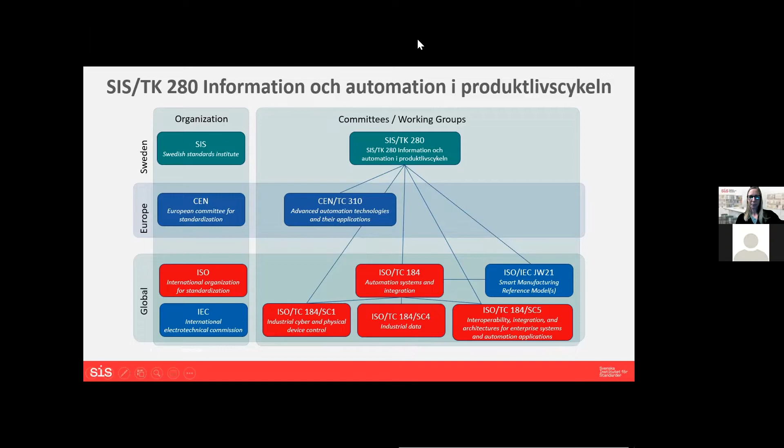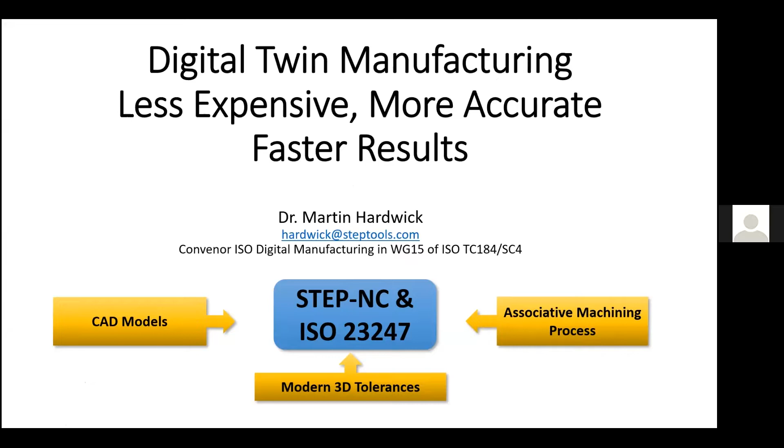I would like to talk about digital twin manufacturing using the new standard that was just mentioned, ISO 23247. This is a framework standard that describes how to fit other standards together in order to make digital twins during manufacturing.

The benefit of doing so is that we have these real-time models of the manufacturing, and those real-time models allow the development of applications which reduce costs, produce more accurate results, and produce them faster.

The ISO 23247 standard is a framework. It can be used with many other data standards, but in what we'll be talking about today, we'll be using it with STEP NC, which is ISO 10303-238, or more concisely known as Application Protocol 238.

The thing about 238, or STEP NC, is it takes the CAD models and associates machining solutions with them so that you can measure how well you're doing based upon the tolerances on those models. So it's all quite exciting stuff, because we have a framework, we have solutions, and we have the ability to measure on the shop floor using those models.

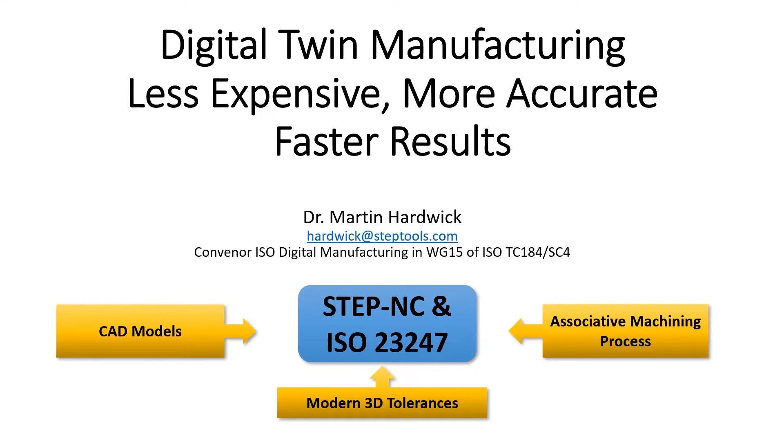So a little bit of background. I don't know how familiar people are with STEP. I imagine most people have got some familiarity with it, and are also probably familiar with the idea that it's been around for quite a long time now.

It started around 1995 with enabling the exchange of solid models. It moved on around 2003 to also reliably exchange assemblies of those solid models. Then with the first edition of AP242 in 2015, we were able to exchange annotations on those models so that you could visually verify what was happening.

And now most recently, in 2020, we released edition 2 of AP242. ISO released it, and that enables the exchange of tolerances. That's all work that took place in SC4, independently of my particular group.

But the key takeaway is that STEP keeps expanding, and when we do these expansions, they tend to be of a pretty substantial nature. When we first in 1995 exchanged solid models, many people were willing to say that you could not do that using a neutral data standard, that you had to do a direct translator. That's important to remember, because it did take 5 or 6 years for the exchange of solid models to become reliable.

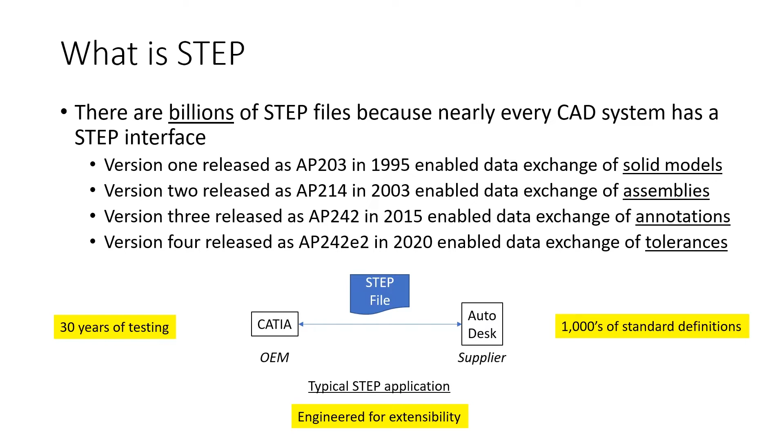So that's what we're trying to do with STEP NC: we think it's more efficient to put the manufacturing process into the same STEP file as the manufacturing workpiece, so that the results of each working step can be compared to the requirements for that stage of the manufacturing.

So we have had 2 editions of 238. The first edition was enabling precision machining, and there are now large numbers of shims being produced using AP238 for commercial airplanes. We predict that version 2 of 238, which was released about this time last year, is going to become very important for the precision assembly of aircraft components.

The way it's being done, largely speaking, is by combining your STEP file that comes out of your CAD system with an APT CL file that comes out of the CAM system, that then can go into a digital twin application that the intelligent CNC can process and send back results using QIF, MT-Connect, and other standards. And I'll talk a little bit more about this in a moment.

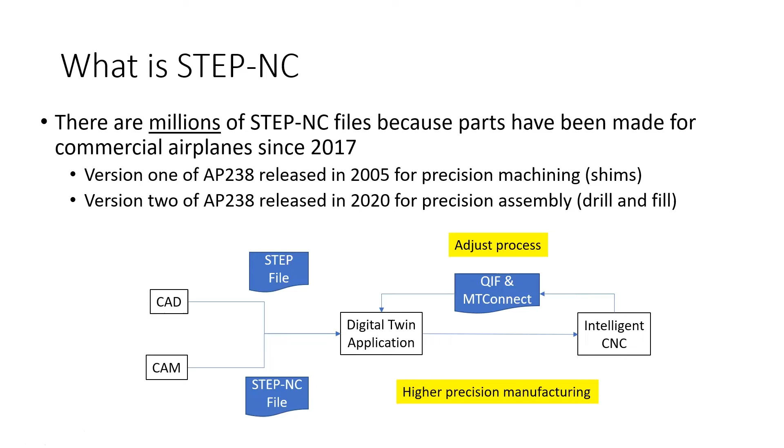So what we've done most recently is release the 23247 digital twin framework for manufacturing. So what we're looking to do is have lots of devices on the manufacturing shop floor, physical things, but also virtual things such as processes that are to be executed. There will be data collection going on with those processes, as well as dynamic control.

Using these digital twins, which are the digitized version of the physical or virtual things on the floor, we can then enable a range of new applications like real-time control, offline analytics, health checks, predictive maintenance, and so forth, with the new benefits of in-loop planning and validation, better production scheduling, enhanced understanding, dynamic risk management, and so on.

So within this framework, we see STEP and STEP-NC being used to model these digital twins, and we see MT-Connect and QIF being used to send information from the shop floor equipment to those digital twins so that they can be updated in real time. So the key thing about the framework is it's all about making twins. It is only a framework, although I'm very much committed to using STEP and STEP-NC with it. Other standards could also be used. But it is focused on manufacturing, with the communication protocols having been developed to be suitable for the manufacturing shop floor.

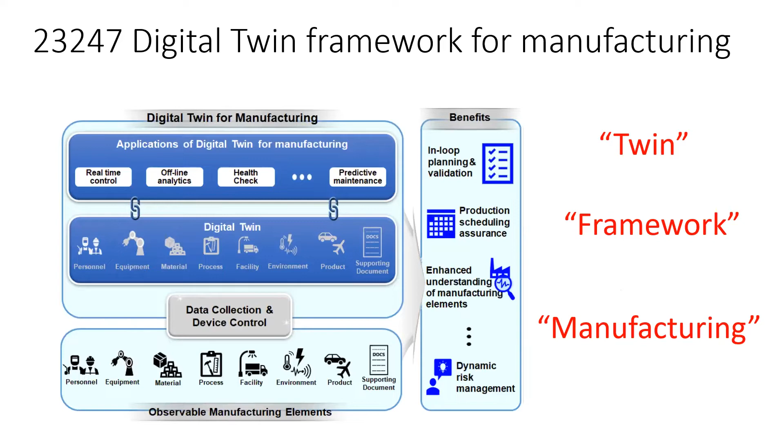Here's a more detailed version of the architecture. It is layered on the IoT architecture, which is 30141. There are various functional elements suggested for helping the implementation. The digital twin entity, as I said before, is going to be a data model, a product and process model of what's going on the shop floor. Then we have the collection and control entities, which will be collecting that MT-Connect, QIF, or other kinds of data, which will be emitted from the observable manufacturing elements as they execute. So we observe at the lowest level, we collect at the next level, we model at the third level, and then we learn and act on those models at the fourth level.

And this, as I said, is the ISO 23247 standard, and it was just published this month. So you can go to the ISO website today and purchase the standard. And we are now in the process of creating promotion materials to help people further understand how to use the standard and why they want to use it.

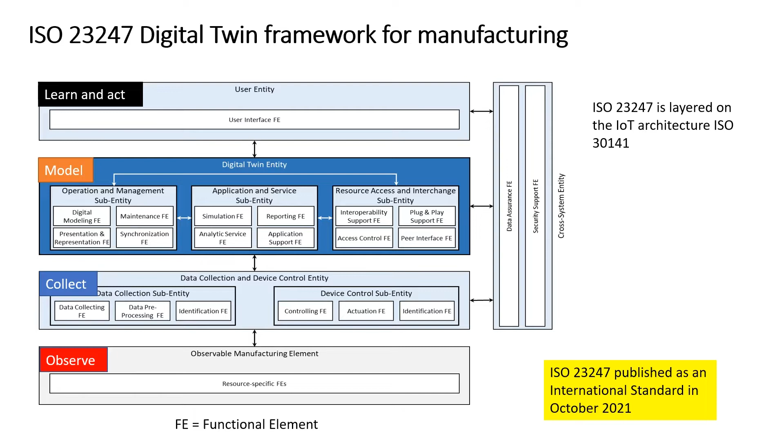In order to be able to use this kind of framework, we have to be able to make digital twins. So one of the first things we need to do is develop a new pipeline that, instead of making G code for machines, makes STEP-NC for machines. That's been our focus for the last year or so, creating the software systems to make this possible.

In the existing process, the CAD operator will make a model. That model will be sent to a CAM operator as an IGES file, or a step file, or some other kind of file. Today's CAM systems are largely set up in the expectation it'll be a collection of surfaces in an IGES file that the CAM operator can then create algorithms that will do the machining of those surfaces from whatever the stock happens to be.

Once the algorithm exists as a process, it then gets posted to G code, and that's actually quite a sophisticated, convoluted process, because every machine tool is different in many small ways. It then goes to the CNC, and now you essentially have a CNC operator who has to do the final stages of the debugging of that machining, and that is actually both tedious and stressful.

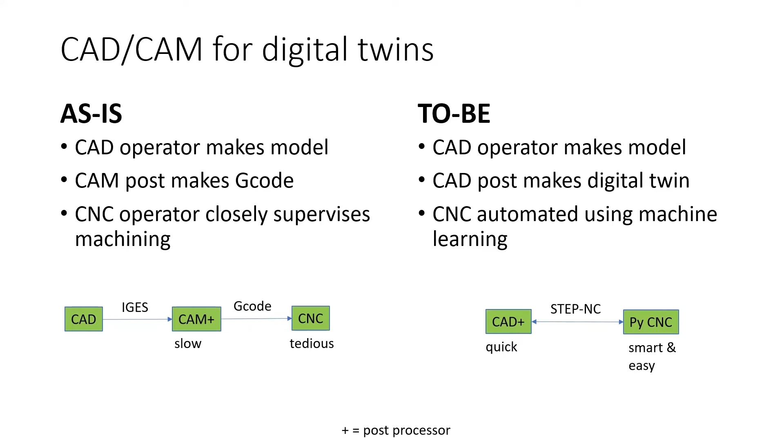Again, it's not going to happen overnight. It's going to happen over the next 5 years, but it is going to happen at this point. And because it's going to happen, we're seeing the leading industry vendors, folks like Lockheed Martin and Boeing, and soon we believe Raytheon and other aircraft manufacturing, shipbuilding, advanced shipbuilding, are beginning to investigate what this new way of manufacturing looks like.

So here is a test part that we've made. For historical reasons, it's made to look like an ashtray, because automated manufacturing started at MIT back in the 1950s, and the first part they made using the APT programming system was this ashtray on the left here.

Being of a historical mindset, remembering the long history of everything, Lockheed Martin is essentially saying: okay, let's show that the new generation of automated manufacturing can do another ashtray to prove it's feasible. And that's what they've gone ahead and done, so that you can very quickly and easily make this ashtray with the minimal number of data entries, so that it should be reasonable for the CAD operator who made the model to quickly add in the basics.

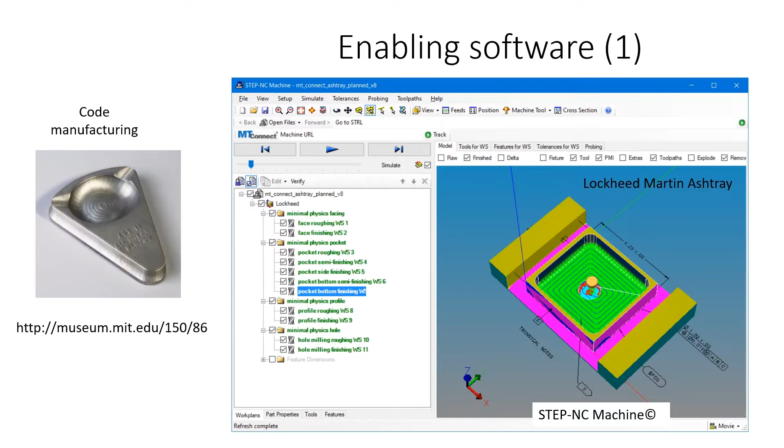So we have our enabling software that we're building for this. We're looking to minimize the time to make the digital twins, and we're looking to maximize the opportunity for optimization and analytics.

So we have the ability with the UI DLL to either make the data, and we're beginning on the ability to intelligently process that data—the beginning of what we might call twin analytics—where there are large databases of previous runs of similar operations on similar models, which are used to advise on the results. So on the shop floor, it becomes quick and easy to do the machining, and quick and easy to get a reasonably efficient machining program.

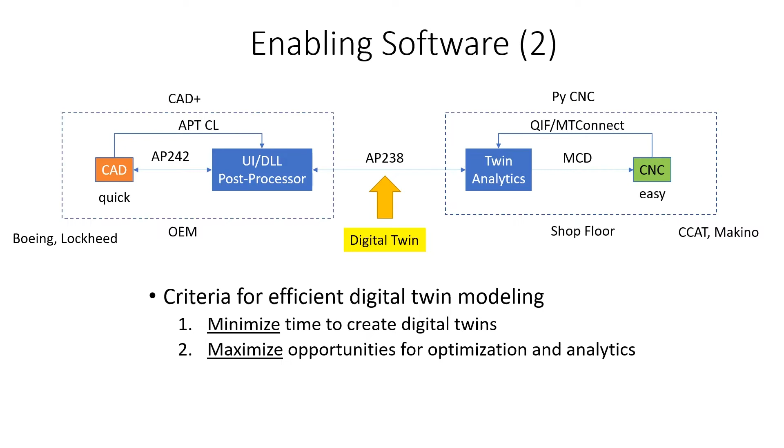Okay, so with these capabilities, how are people going to take advantage of it? That's something we investigated heavily in the summer of 2020. We built some early prototypes that asked: okay, if we have model-based machining available and the right kind of infrastructure, what can we do?

And one thing the guys out of Boeing did was address the need for more flexible manufacturing. They have too often produced very large, very expensive machine tools which will only work for one or a limited configuration of airframe.

More flexible machines are becoming available. Robots are an example of those flexible machines. They are not yet sufficiently strong to be drilling and filling holes, but machine tools that have the flexibility of robots and the strength of a machine tool for that kind of drilling and filling will be available very soon. So rather than have one machine, we'll have, say, 20 or 30 robots on the shop floor. Those robots will most likely be on rails.

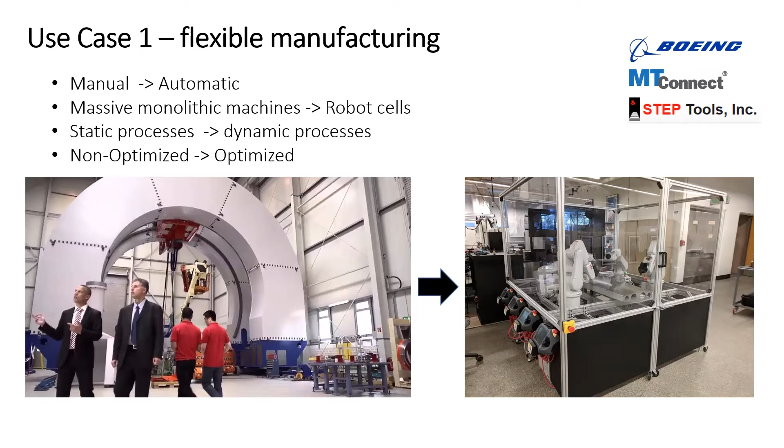Another exciting application we prototyped is based on the notion that although you'd love for manufacturing to be an exact science all the time, it's not. When you're doing composite layout of wings, large dimensional objects with variability in the layout process and curing of parts in the autoclaves, the actual skin you get has different dimensions than the ideal you designed. This is where tolerances come in. As long as the actual skin is within tolerance, everything is considered good. But in order for it to be within tolerance, you need to be quite generous in your tolerance limits, and as a consequence you waste quite a lot of weight.

For advanced aircraft, the cost of that slight additional size is expensive. If we were able to measure every single hole and do the stack-up for every single component dynamically, hundreds of pounds can be saved. We know that's true because for the most advanced aircraft like the F-35, they take the time to measure every single thing. But it's expensive, adds a lot to the cost of the aircraft. It's still too expensive for, say, Boeing to do for their commercial aircraft.

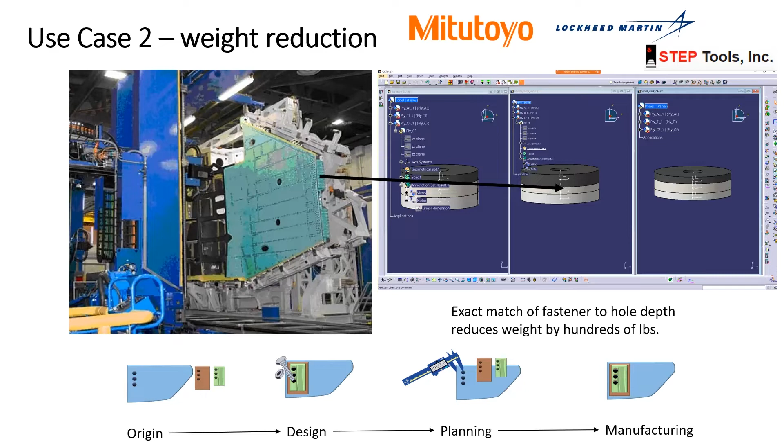The last use case is machining. This use case is based on getting things done more quickly and making more economical use of all available tool wear. Again, when you have models of everything on the shop floor, you can have models of how much material is being removed, and you know what kind of material is being worked. You can build your algorithms to know how much tool wear is being applied at any particular point, and therefore make much better decisions about feed speed trade-offs versus available tool wear trade-offs.

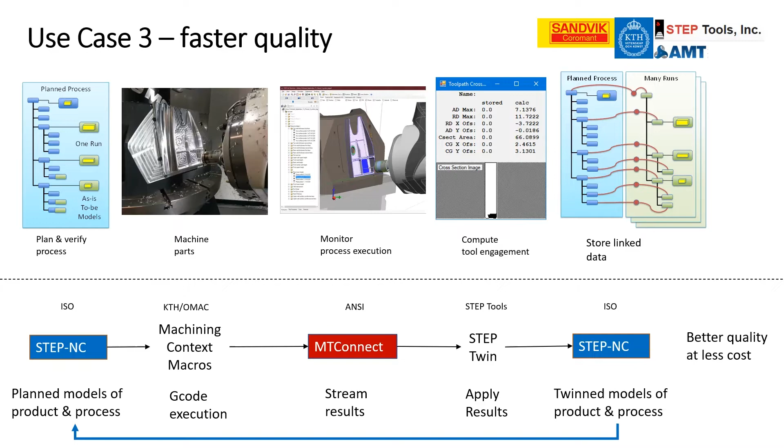You can't do this in advance in the CAM system because you don't know what tool is going to be on the shop floor, unless you're willing to start with a brand new tool every time, which people do sometimes, but that's expensive again. Assuming you're going to allow reuse of tools, a second use of tools, you need to plan it correctly. If the tool is going to be more or less useless at the end of this job anyway, you may as well drive it as fast as possible to the end of its tool wear. But there are other kinds of choices—you may want to do a swap in the middle and things like that. Let me move on a bit quicker.

All these applications are becoming possible because of STEP NC, because STEP and STEP NC have such a rich information model. It's that information we're going to be using in the analytics on the shop floor. I encourage you to take a look at that information. You can buy the standard, but you can also go to our website and see the information and how it's all related.

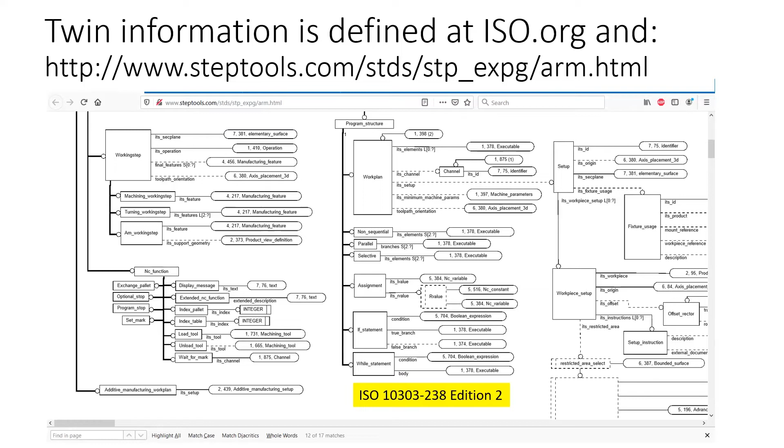Returning to the 23247 framework, again it's designed to be flexible, but also designed to be used with what's practical on the shop floor today. We have multiple networks—what's called the proximity network—going to the data collection entity, which could be a direct connection or some EtherCAT or OPC-UA, a fieldbus connection to the DCDE that does the data collection. The data collection can be efficiently done using something like MTConnect, because you can process that as you're ready, as you build your digital twin entities in your core.

At the top level, the applications using this data can read and write models using the user network. They could be using STEP, but they could also be using an administration shell—they're developing that administration shell pretty fast and furious at the moment—or it could be some kind of open API. The point is that we have the framework available. It's a practical framework that can be deployed on the shop floor.

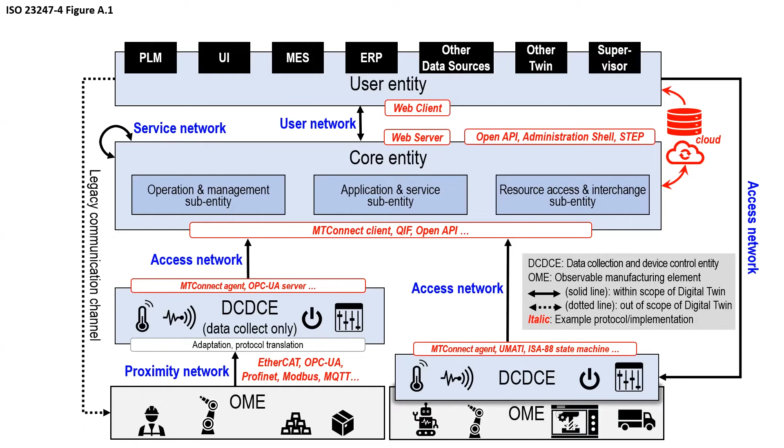So moving towards the conclusion here, we think that we're looking at the beginnings of a new state for manufacturing. It's been called Industry 4.0 elsewhere, but we see the realization of that state beginning to emerge.

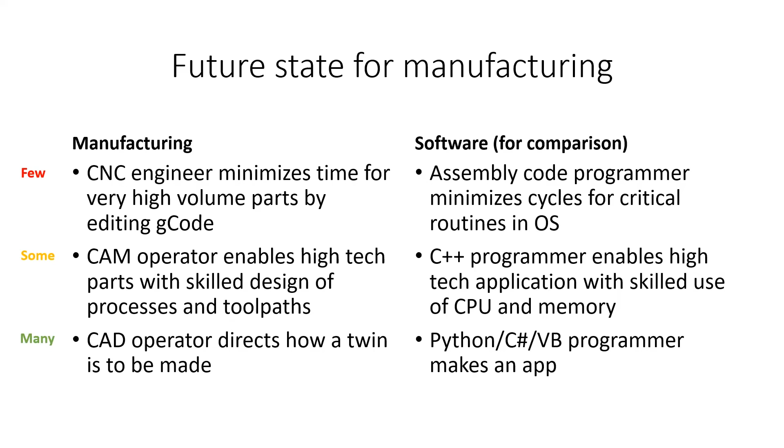Not yet, not tomorrow, but in the next 5 years. The only way to do this is to practice doing it, to eliminate all the unnecessary bottlenecks, to create the way that things should be done for your kind of industry, so that solutions get generated quickly, and so that analytics exist to make corrections on your kind of processes.

So here my final thing is strongly asking people to think about getting started, to join Working Group 15 and participate in the development of these standards. We will be doing AP 238 edition 3. We'll start next year. It'll be the digital twin version of AP 238.

We will be working on the second edition of ISO 23247. So there are useful ways of participating through SIS in Sweden. But there's also lots of high-tech manufacturing, of course, in Sweden. Saab, Volvo, Sandvik, your industries are very famous for quality. So I think you should be out there in order to stay ahead of the curve, identifying business benefits that can work with digital twin manufacturing.